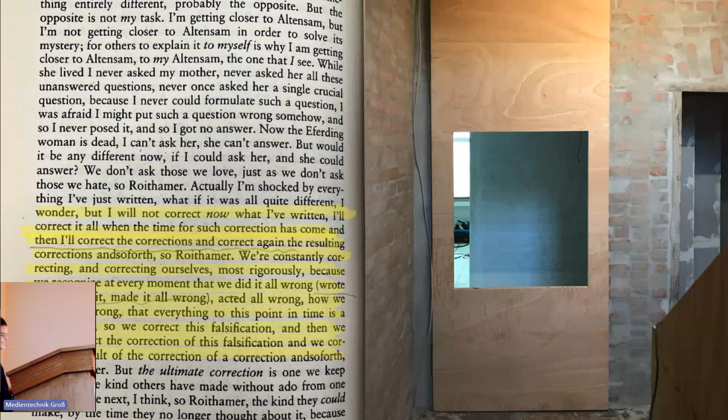I'm reading this long passage because he's very ambitious in this correction, maybe also the way that we work through this house. You can see, for example, the door, one of the first ones that we built, which was also good to use during summer without any glass or real climate use.

After a while, when it became cold, we had to fix it a little bit, and then, of course, put a glass in it and finish it so it could be used. These corrections can also be read as a correction of the house, which is a little bit small, almost downscaled. We made the door blade bigger than the opening because the house was not as magnificent as the other 19th century houses.

Building this one door blade also required some more adaptations, like the way it closes with a specifically made metal plate, and a lock that is built into the door itself. Then, for the next floor, we corrected our initial design.

We made a twin pair of doors, and you can see in the staircase, which had originally been stolen for firewood by the neighbors, that we have a temporary one. Two doors are already built, while the other story of the house, although we are living in it, is still empty.

Now, with temperatures declining, we also made another small correction and added this door closer. And here's another view into the staircase, where you can always read which parts of the building are inhabited and which are still bare.

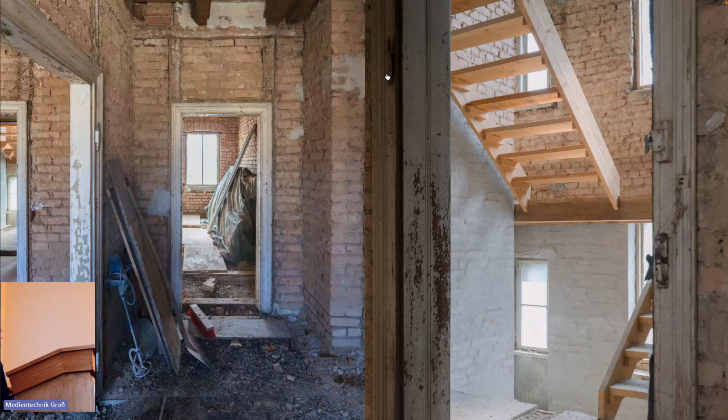In the beginning, this is an impression of some of the bare walls. It's nice to learn that these buildings are easy to demount, and you work with the material, very basic means. It was fully populated by pigeons, and unfortunately it took some years to clean it up.

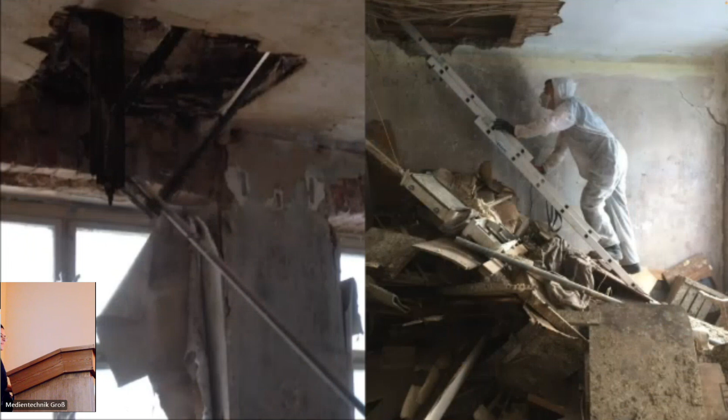We had the chance to correct a lot because there wasn't so much substance that you had to keep, or that was worth keeping. So we stripped everything to the blank bare walls. Another image of a destroyed room, almost, with ladders put through the building to find holes and climb up through them, since we didn't have a staircase anyway.

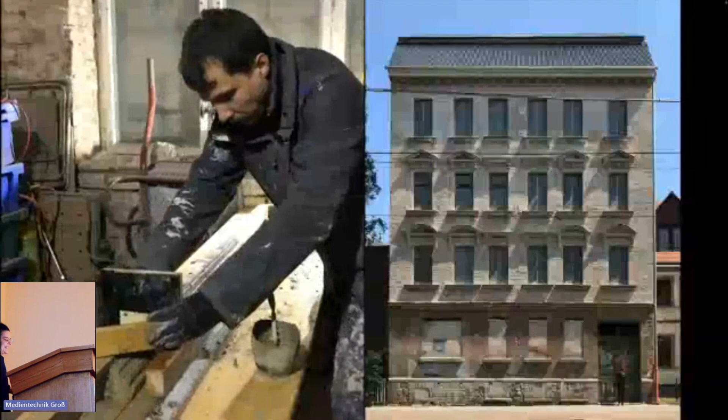And maybe moving to the outer side, you can see that it was covered with a net. We used a contractor's scaffolding in the beginning and didn't have to pay a lot for it, so we could attack all these ornaments on the facade ourselves, start correcting them, and learn which parts were made from plaster or concrete.

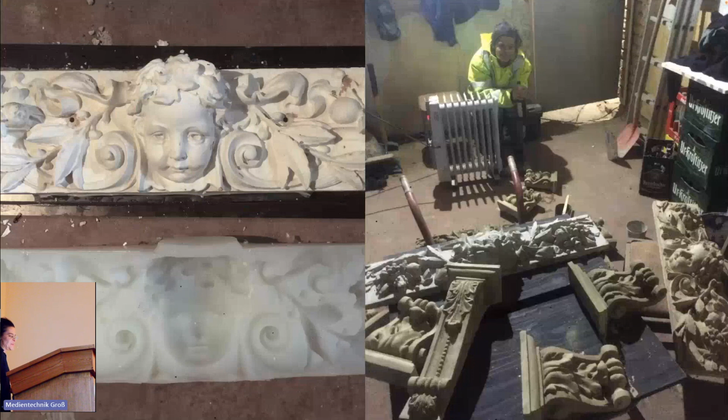We used two-component silicone to make molds of all the existing ornaments, and every week you could make a new one, since that's how long it takes to dry. When you have to make 52 of them, it takes a whole year, which we did while commuting between Zurich and Leipzig. Of course in winter it's difficult because the silicone doesn't react and stays liquid.

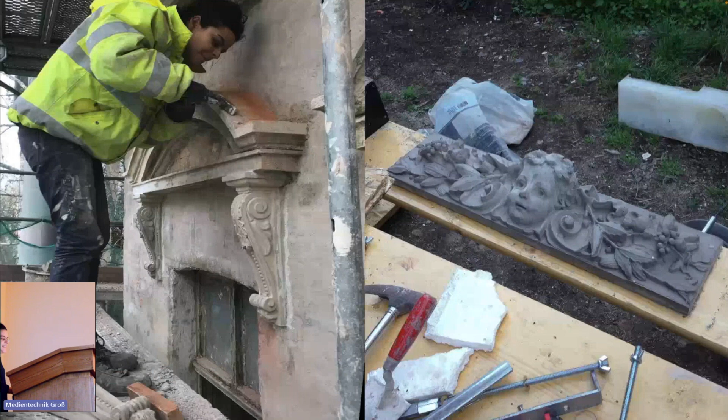We managed to mount these ornaments back with some glue and chemical anchors, while other parts made from sandstone you just repair on site. It's nice to learn which parts of the facade work in which way.

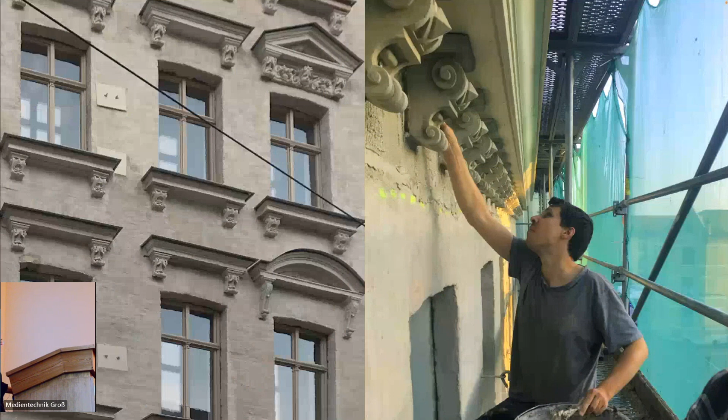In the end, the plastered walls just had a small, very thin layer, because we couldn't manage to bring all the plaster buckets up on the ladder. I think it's a phase that will remain like this for maybe two years, until, if we can afford it or if it's necessary, we rebuild the scaffolding and finish or even repair what we already did.

Another part of Thomas Bernhard's Correction is this perfect cone that he's so obsessed with, which he built for his sister. After his sister's death, and after his own death, the cone must be entirely abandoned to nature. There's no telling how far Roithamer's heirs will go along with that stipulation. Once she sees the cone, she's bound to be happy, underlined. A perfect construction is bound to make the person for whom it was constructed happy, must make her happy again. The idea was to make my sister perfectly happy by means of a construction perfectly adapted to her person. Well, in her case, the whole building was so perfect that in the end the idea basically failed.

So this is maybe not what we take as a reference, but the obsession, and maybe the positive way that working on your own and making corrections could have. Since our building is not perfect at all, we can afford to make all these corrections, because we think we invested little means, so it also doesn't hurt to rethink what you've done.

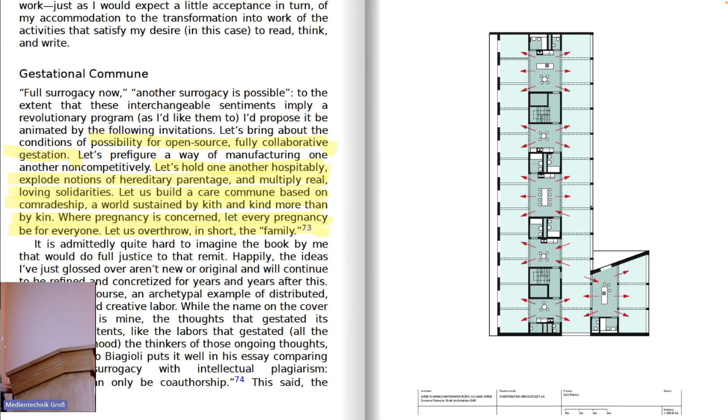When we set on this competition, we were working on a lot of different modes of flats. In the competition brief, we rather proposed to offer one structure where we hoped that all of these different flats and modes of living could take place, with no typical master bedroom, children bedroom structure to be found. So we combined all the services, staircases, bathrooms, kitchens in the middle, and thought that the facade rooms can stay flexible and neutral in use.

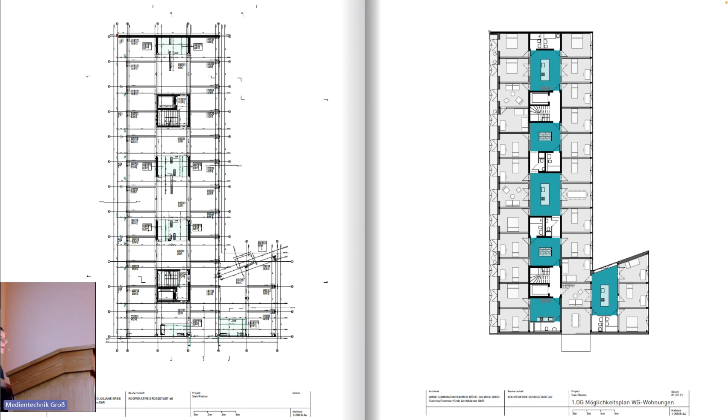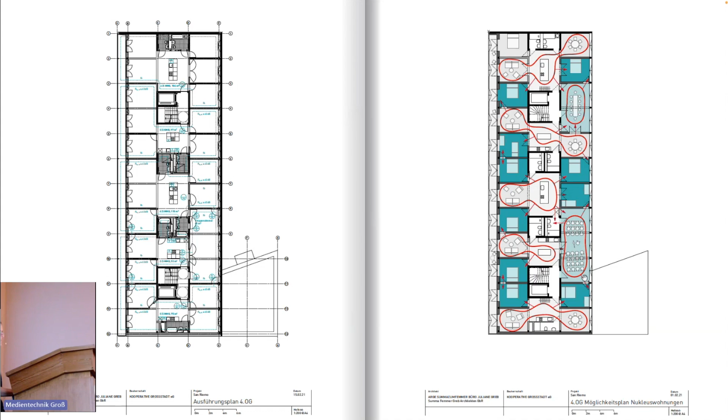Already in the competition, we drew these diagrammatic plans where neighboring living rooms can be shared, so flats work together. A floor plan can also be used for shared flats with a lot of bedrooms, and a floor, now on the 4th floor, where rooms have several doors and apartments are linked and connected through communal rooms shared between several other flats, like the light green one here.

This is another excerpt of Sophie Lewis' thinking: that children are not your own, but genetic heritage is just a reassembled genetic package. She is promoting full surrogacy, meaning to take care of everyone.

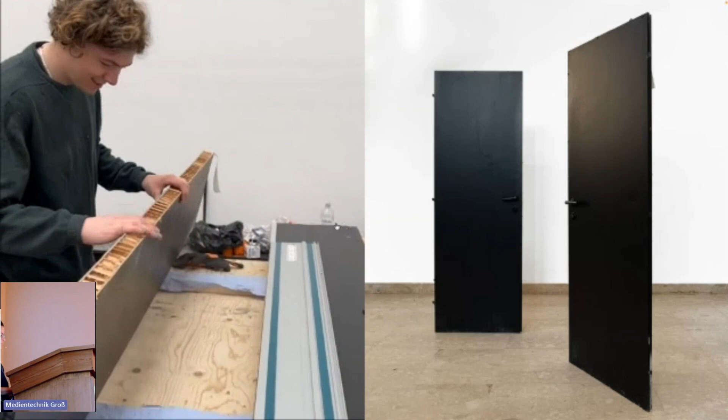Maybe another small excursion into how we built the bathroom. We collected a lot of material in the Biennale because the aim was to always work with what we found there, to not bring in any more material. It's part of our idea of being open for maintenance, where we also maintain our environment. We also found this material, these two Italian doors from the Italian pavilion, and made them wider and higher because this toilet had to be accessible. Accessibility is one of these topics that talking about toilets and taboos and inclusion also touches.

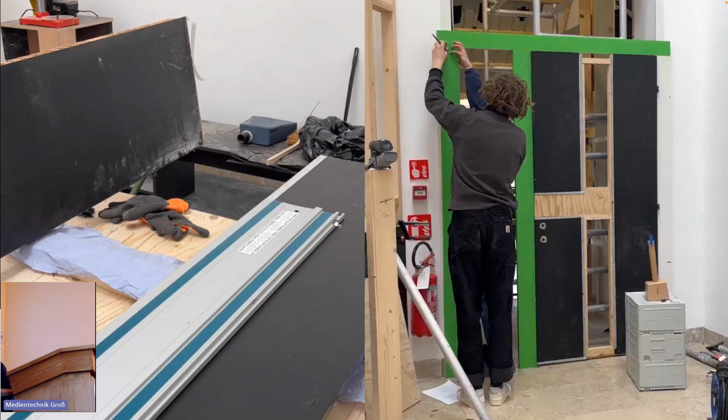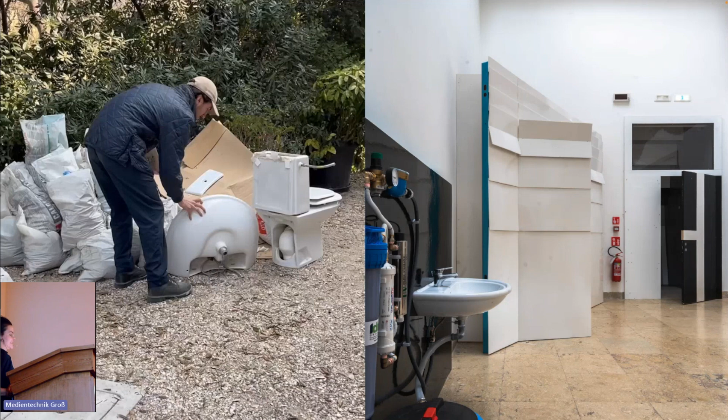So the idea was to make this enlargement of the two small doors visible. Here we mounted a side window to the former exit door of the German pavilion. We also found this sink from the British pavilion, who renovated their bathroom, so for us it was perfect for these six months. And we used this water recycling plant, because the pavilion doesn't have wastewater or water, which was the beginning for us to think about an alternative way to build a bathroom, which kind of started this whole process.

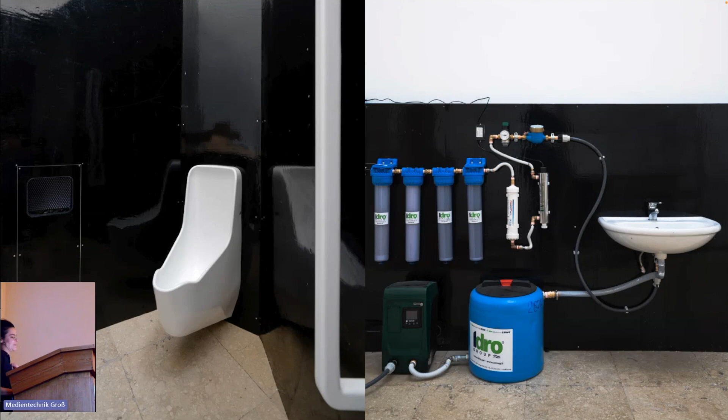Another feature was this gender-neutral urinal for men and women. You sit on it forward and backwards, and it was a bachelor project by two design students in Bern. It worked very well for all the visitors. It was maybe an obvious one. It worked without water, since everything here works without water. It was maybe a little bit easier than our toilet, which you still have to get accustomed to, talking about taboos.

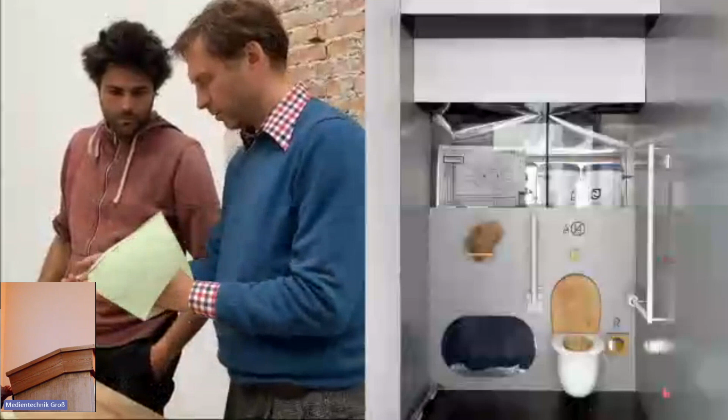And it's a design that is made as a dry toilet, also to be used in the cities. So the idea is that you have a chute. The inventors, Tom and Florian, took a lot of time to design this bag. They showed us how to cut it. We had to reproduce many bags also with the students.

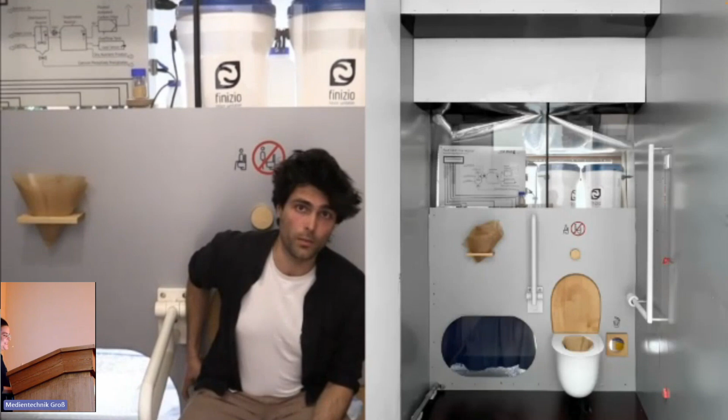When using it in the toilet, you have to put the feces in the bag and try to hit the urinal separately. Then, as he's pointing to, the bag slides through the toilet, and you could collect all the excrements basically in the basement of a building, of an apartment building. So this is the idea. They also have it patented. We tested it six months at the Biennale live, and we also really collected all the excrements.

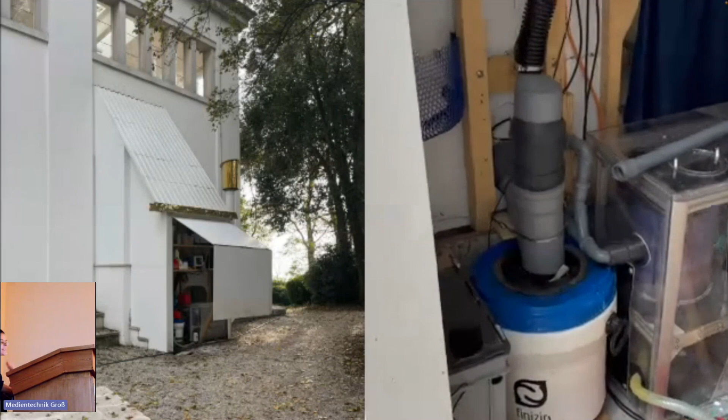And I mean, of course, it sounds maybe funny, but we are really fascinated by it, because the idea obviously is also to use the products in the end as fertilizers, and to try to create a circular treatment of it, and use it in the end also for excrements instead of flushing down everything and then using a lot of energy to clean our wastewater again.

We had to kind of hide it because it's not allowed to transport these substances on the vaporetto, so we covered it with an alternative sign, and then gave it to a farmer growing biological crops on the mainland.

So exemplary, we tried to show the whole process one time, how things could be done differently in the cities. And I would like to use the idea of purity and danger for another sub-project in this Biennale exhibition.

Mary Douglas writes: first, consider beliefs about persons in a marginal state. These are people who are somehow left out in the patterning of society, who are placeless. They may be doing nothing morally wrong, but their status is indefinable. So things that we don't know, or that are marginal and cannot be put into these categories, are special to us and maybe are not taken care of.

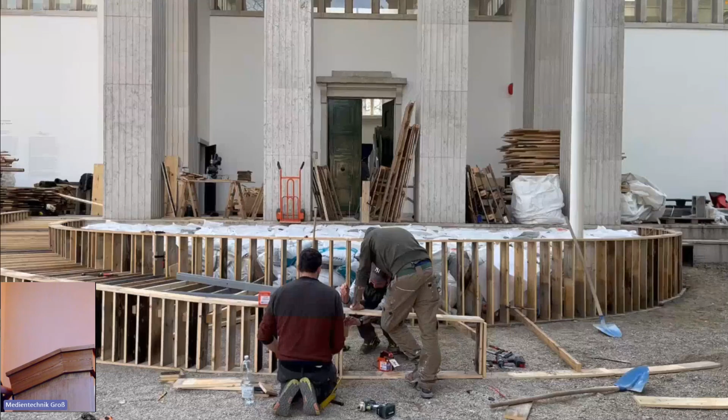Like these ramps everywhere in the pavilions. Since we wanted all of our installations to be useful and practical, and this ramp was broken anyway and taking you on detours to the back, we designed a new ramp out of existing material like the Ukrainian wood and sandbags, and built a more magnificent entrance gate covering the staircases of this Nazi building.

Which Ernst Haiger rebuilt in 1938, I think. For us, this is now a symbol for inclusion, but it also made sense while working because we could use it for our work and also for some heavy machinery.

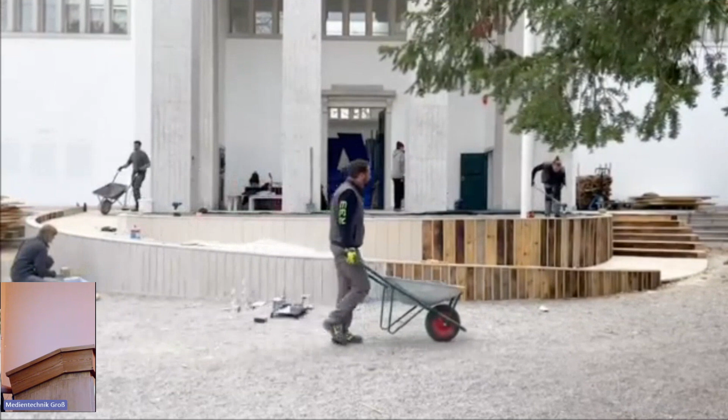We spent this time camouflaging the ramp to match the existing structure, because we also continue building with what there is, and in this way we reinterpret the whole building with its problematic history.

And of course, also as an architectural idea of how to work with reused material, we wanted to test some other strategies than only collaging, like we did when painting everything in the same kind of stone.

Also, during everyday life, seeing this infrastructure at work was nice. After we set up all the exhibition, we started a 6-month program where we invited apprentices and architecture students every week, and they also used this platform to work.

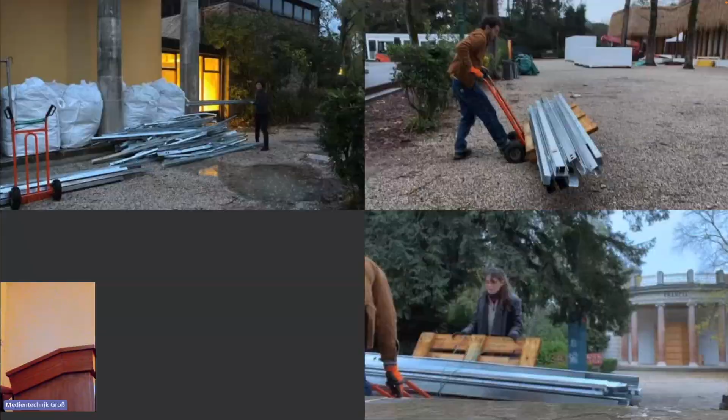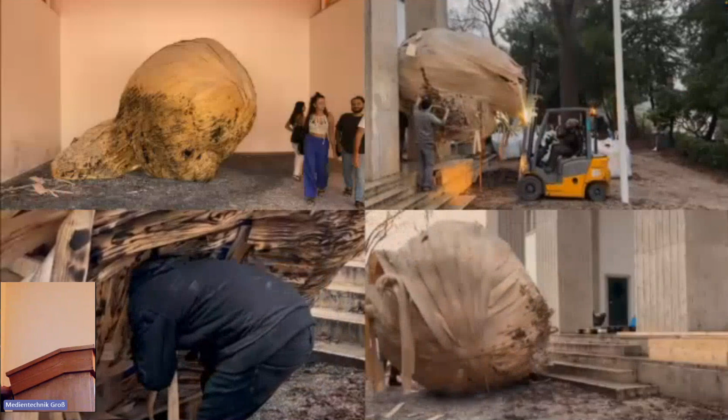The idea was that all the recycled material we collected in the main hall could be used for small interventions in the city. This is how we collected everything from the Biennale area, and also some bigger pieces of artwork which in the end didn't fit and had to be cut off.

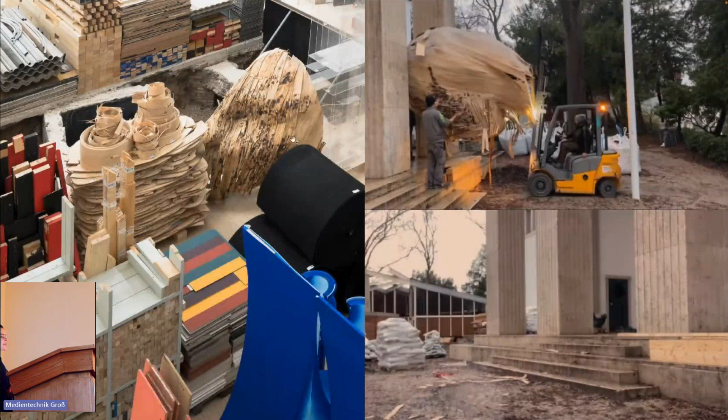Here you can see Latifa Echakhch's sculpture, but only maybe a quarter remaining in the main room, as all of the material was used up by these workshops in our installed workshop.

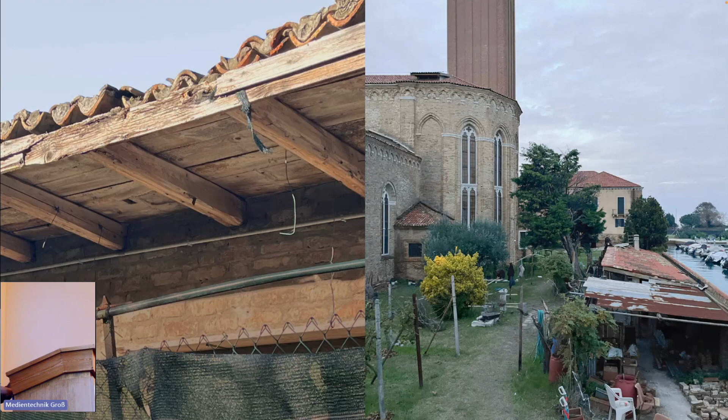Presenting all the working tools, one of these workshops, for example, involved repairing a small shed next to a very beautiful monastery right at the lagoon, with students fixing roofs using some of the wood from the pavilion, and also cutting or repairing another door.

Very carefully cleaning it, and while cutting the material in the workshop, it apparently smelled a little like frankincense. So they figured the wood was maybe already used in the monastery somewhere else, and had this smell—so it was maybe already 400 years old.

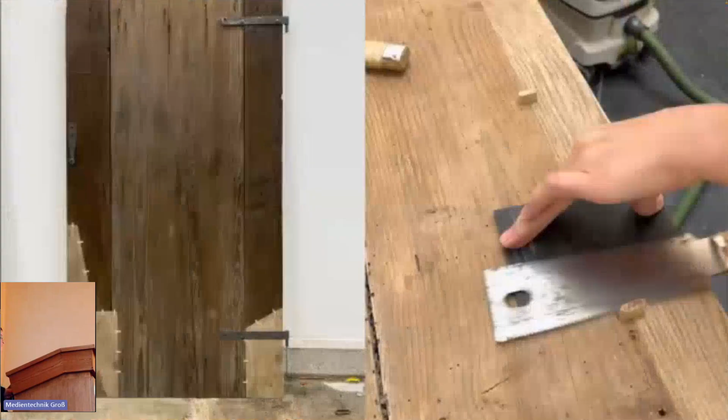So you start to treat it very carefully, only removing what is really bad, and taking the chance, although the work is very small, to still design carefully, like they did with these dowels and patches shown here.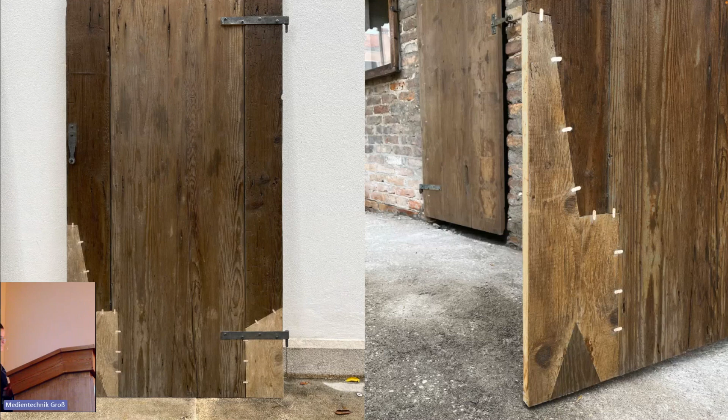I have a very short last door to show, from this student work. Anyway, we also built a lot of doors, because we are obsessed with details, where all of the problems come together in doors.

We did a whole semester with our students only working on doors, because you can exercise and practice a lot there. Although it's only small, it bears a lot of material for discussion.

In the end, for this semester I wanted to show the closing striking plate, which Lucius Burckhardt is maybe an inspiration for. It's maybe the minimal intervention, the English title of this book. This is a closing plate that was broken on top, where the door didn't close anymore because a part of the plate was missing. Although he's talking about urban planning and a much bigger scale like landscape design, we think it's suitable for these very small interventions too, because we are in control of ourselves.

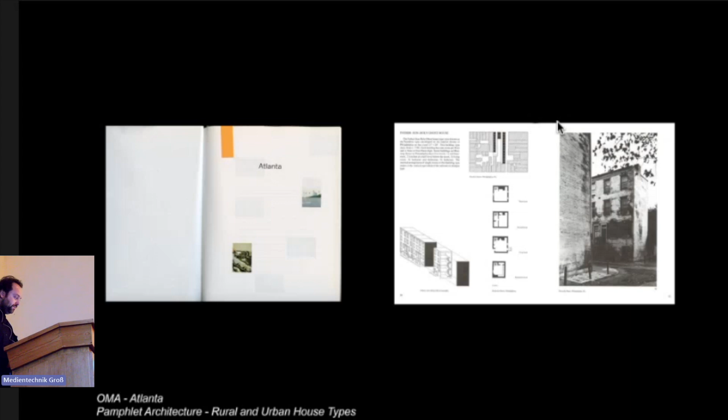So we were looking at other architects' works who were researching American architecture, but also in the realm of the arts and photography, and things between art and photography. But also documentaries, movies, video art projects, but also subcultural zines and magazines. And the idea of archiving became very important for us.

So we always call these trips unscripted investigations, because we do prepare them quite thoroughly. We do this very intense mapping where we try to put everything into maps that might be interesting for us to visit, and then we mostly book a first hotel and see where the journey is driving us. This led to a number of very curious visits, visiting places and meeting people.

So we document important and not so important buildings, street scenes, but also encounter various people along the way, and try to channel these into different formats, like publications—this last one, Cite, which is a Houston-based magazine—but also exhibitions where we try to channel the videos, the scraps, the conversations, the audio files, everything into pieces.

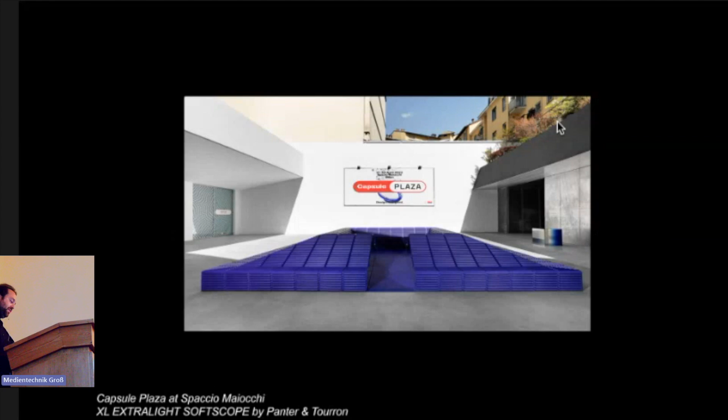The specials, on the other side, are longer stories where there's often a collaboration between an office, but also a company or brand. Last year, for the first time, the team around Capsule also introduced Capsule Plaza, an ongoing idea of bringing this print medium into realization, working with younger and established practices to create an environment of exchange, exhibition, listening rooms, and discourse.

It relies on the idea of - this is where it's located, in this 1980s industrial block, where the rents are cheap in Zurich, or cheaper. And it relies on this idea of associations, Vereine. In Switzerland, the easiest way to be a legal entity is to found a Verein, an association.

So in order to rent this space, we founded this association and got together with a number of people. By this we also created this table of Statuten, very short, because usually you have all these rules and layers, but we wanted to keep it simple and develop these Vereinsstatuten along the way. Soon we will have a revision, adding some new ones and taking out some old ones - this is a process of founding this association that is still ongoing.

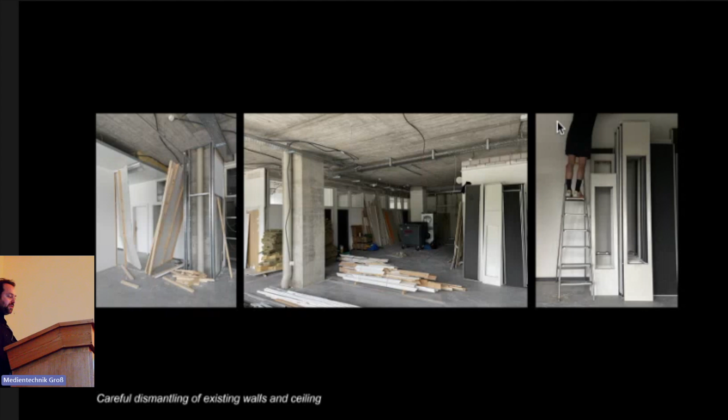Because the space didn't really meet the needs of all its members, but we also didn't have any budget, everything that we did in the space was done by the group - a good idea, but not so easy to coordinate with 21 individuals, most of whom have full-time jobs, being self-employed. But time has been used as a resource, as well as the resources that we found there.

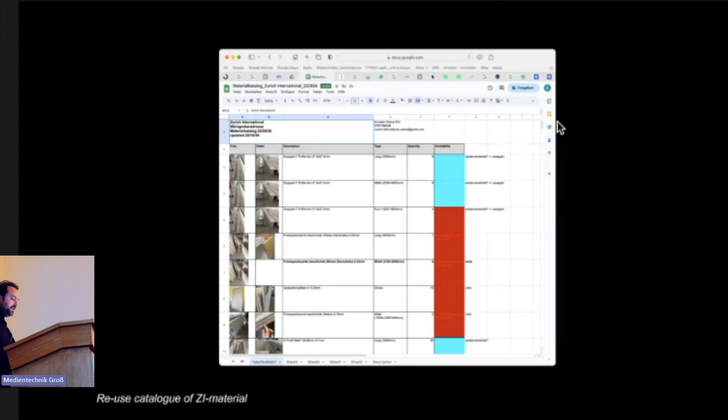So what we did was create this inventory list of elements that we disassembled - a careful dismantling of elements that we didn't use, like ceiling panels, drywalls, doors, and other things. The idea was that the contract gave us this space 3 months rent free, but we had to take care of what's inside. So we took in this deal.

We did a documentation of the existing space, but also then built these flexible infrastructures, what we call plug and play, where we have everything mounted to the ceiling.

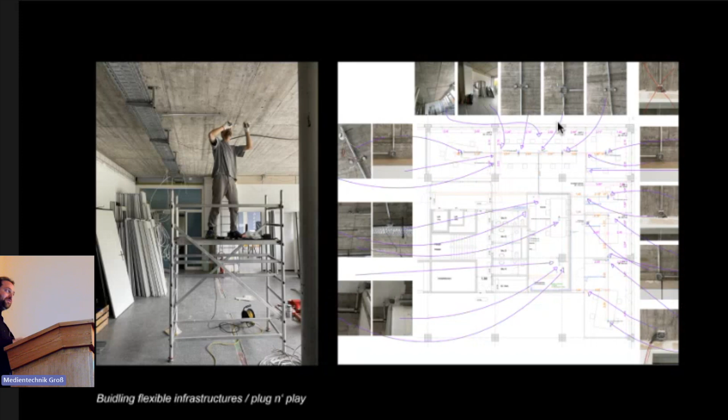So we took everything that was existing there away and created our new system ourselves. You could do everything yourself except connecting the last bit of electronics to the plug, for example. We did everything ourselves up to that point to keep everything safe and economic. At the same time, we also asked companies to send in their youngest apprentice to do the job, because that would ensure it's cheap.

We also work in collective design workshops where clusters of people work together to tackle new design tasks that come up in the space. We're nearly done, but it's still a work in progress. Just for scale, it's a 270 square meter office space.

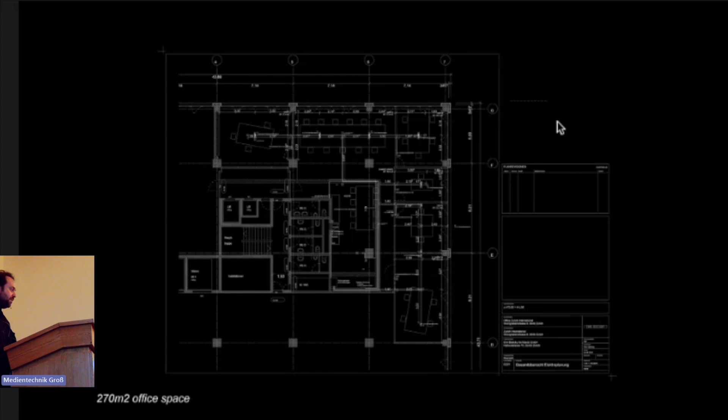But this big space also enables us to create events and use it according to whatever comes to mind. So we had visitors from TU Munich doing a trip to Zurich and doing their apéro at our space, but also private exhibitions, feasts, and other things.

As said, most of the projects we're working on are done collaboratively. This is a competition we did together with Amateur Global from Milan, friends and colleagues we met through Superposition. This competition was based in Basel, more or less in the heart.

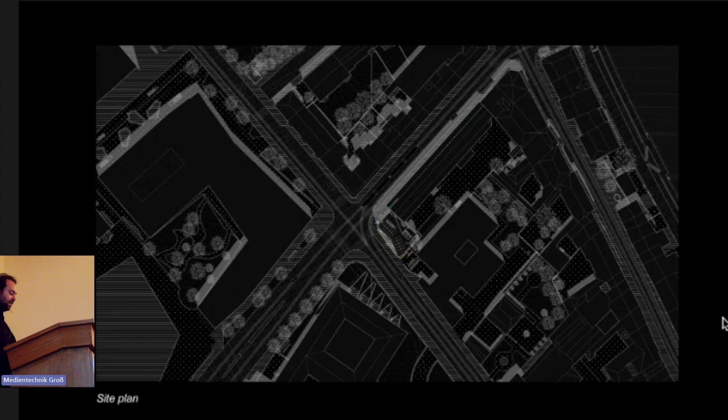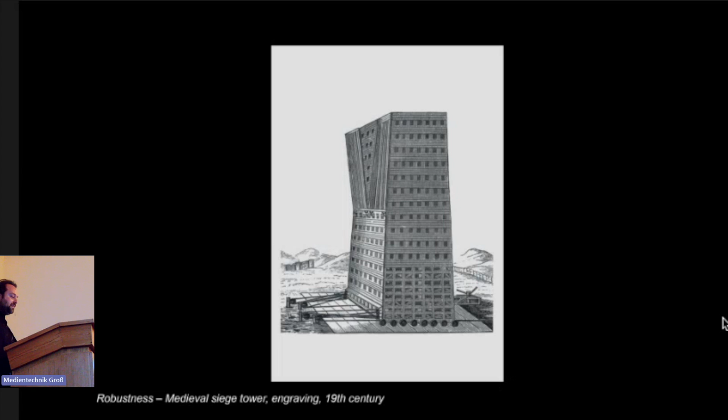It was connected to a new tram pass that would be installed. What we were interested in was finding a solution to make a connection between these two typologies — the big institutional projects and buildings, and also the smaller housing projects. So we tried to create a volume that is at the same time quite robust, but elaborate. We wanted it to be a timber construction, so we were searching for robust structures in timber that could sustain this idea of fighting against other buildings in their surroundings.

At the same time, we were interested in this idea of high and low tech, and how these elements can be transformed from one generation to the other. In this area of Basel in particular, you have a tradition of timber construction, so that was also a reason why we wanted that.

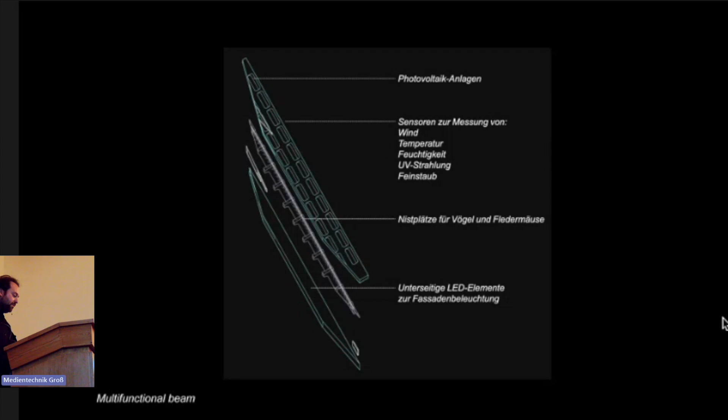At the same time, this high-tech element is something that came into place. You'll see in the images later where we involved a multifunction beam, which has all sorts of sensors for the building, and PV, but at the same time has nesting places for birds. So it's a timber construction with a timber facade that has these slits you'll also see in the reference — it's an office building for research, for the Bodmer Research Foundation.

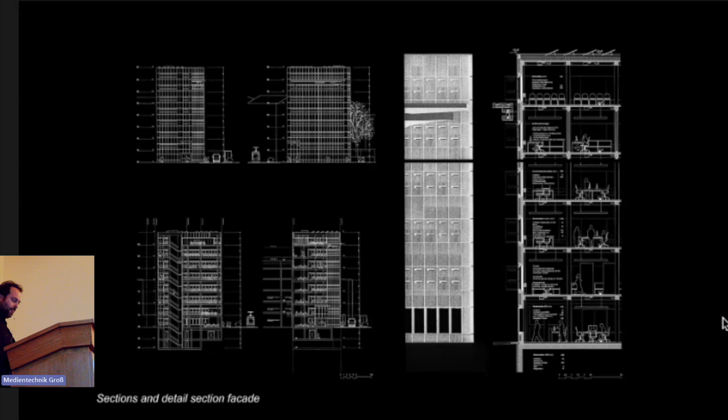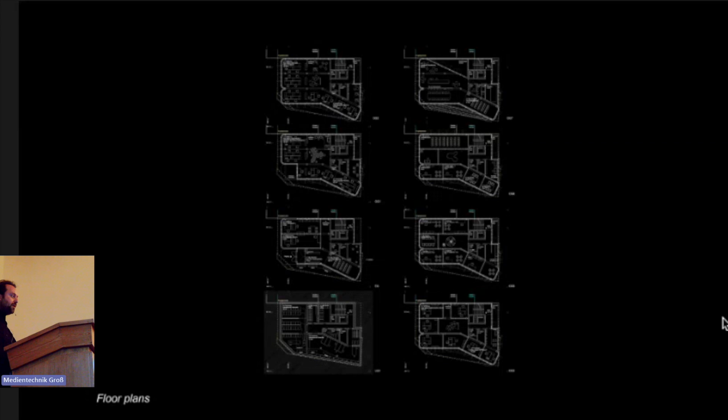And I'll just go quickly through these plans. What interested us in the end was also the economic factor of doing a competition. So what we tried to do with renderings, for example, was not render the entire image but only do half of it, to save time and money. But also use old renders and collage over them. This practice of not finishing an image was something we kind of fell in love with.

And in the next project, the reuse of images is a big topic. We always have a tendency to be quite late with the images in our projects, so each project has its own way of dealing with that.

The second competition we did with Amateur Global was Davoser Pflug, a master plan and urban scheme project, but at the same time creating a new train station for Davos Dorf. Most of you probably know Davos from the World Economic Forum or ski trips.

But Davos is a city divided into two parts — Davos Platz and Davos Dorf, with two train stations. It's a Streusiedlung, which is a typical settlement you would find in Switzerland.

The proposal was to move the existing train station 200 meters to the new city center square, and to create housing and hotel projects along the way. This is the context that you would work on.

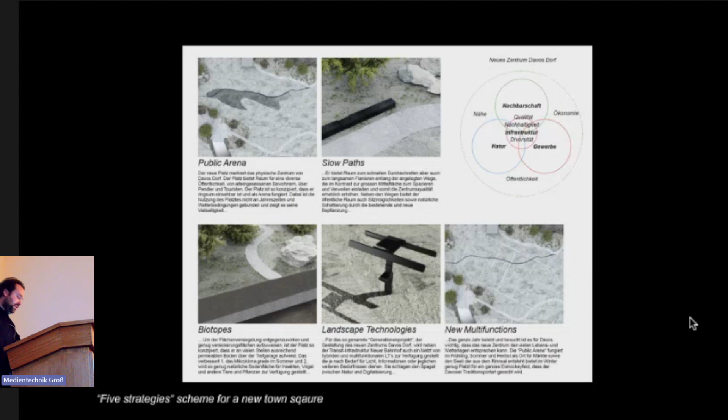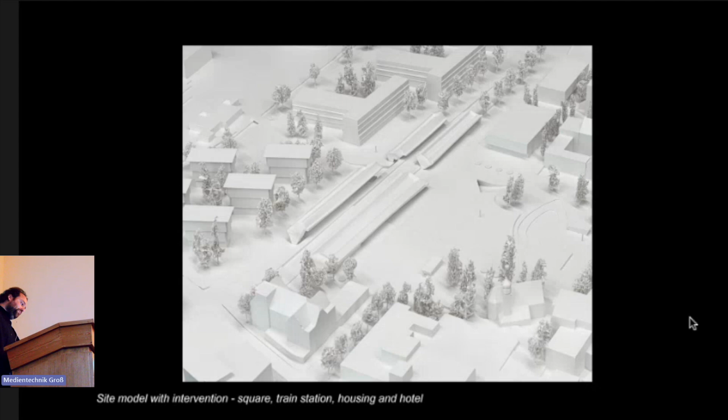Quickly go through that. With this Davoser Dach, we were thinking about a new idea of having a roof. We tried to find a new solution for the Davoser Dach, which is this elongated structure along the train tracks, where we would use also the structure as a biotope. I will come to that later.

For the housing project, but also the hotel, we were looking at traditional housing projects in Davos and trying to apply that to the new structure. This is the master plan.

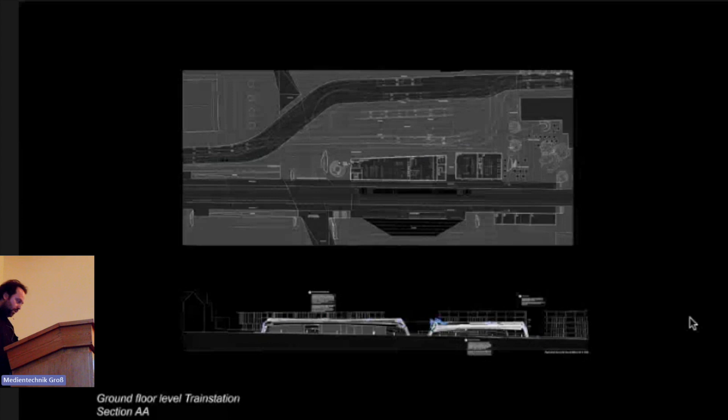With this big square, I will quickly skip that. Yeah, it's a typical infrastructure urban project with a huge parking lot.

But this brutality of the train piercing, for example, through the snow, is something that interested us, having a structure that can deal with these harsh environmental conditions of Davos. Something you should realize is that in Davos in winter you have these strong snow conditions. Even with climate change and warmer winters, you still have a lot of snow, and that's why we tried to find reference in these snow pierces.

We worked together with another office from Milan, but also with friends of theirs who were developing a new kind of aggregate concrete that would be porous, so that vegetation could take over the building over time. So in the beginning the building will be quite harsh, but then over time it will be overgrown.

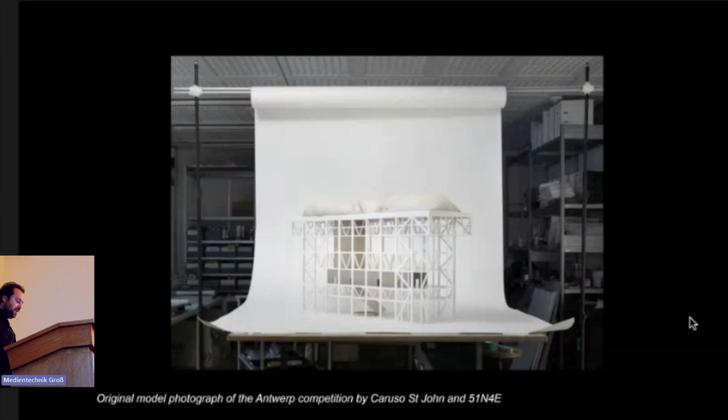This image is a reused image that we stole, so to say. We asked for permission from a competition that 51N4E and Caruso St John did. So this was again a way for us to produce images where we would put our mock-up into this office environment that we took from 51. It's for us a way of reusing images, so again we have this problematic with image use where we would recycle images.

I'll quickly skip that. So the last project I'm showing is the latest competition that we did. We didn't do a competition in one year now because we were concerned with other projects that consumed most of our time, because we're still the two of us working.

This is a competition that we did together with Schneider-Türcher, friends and colleagues from Zurich. Claudio is a colleague of mine at the chair of Adam Caruso. It also brings up the question of collaboration again, which always brings new complexities to the planning process. But with them, it was more than a delight to work, and also very fruitful for the result.

The competition site is located next to Rosengartenstraße, which is one of the busiest streets in Zurich, very loud. It's a reuse project for a church. In Zurich you have over 50 empty churches, mostly Protestant churches, and the city of Zurich wanted, with this competition, to find solutions for what to do with these empty buildings.

So the new program for the church would be to introduce an educational purpose: a library, a multifunction hall, an eating place, and secondary storage rooms.

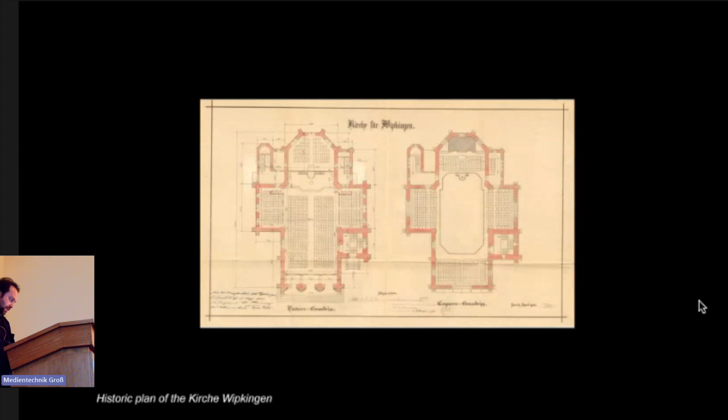The church is neoclassical but uses Gothic elements, typical for Zurich in the late 19th and early 20th century to have these historicist churches. It was used in the last two years of being empty by the Klimajugend, a climate youth organization that organizes rallies and also productive strategies to fight climate change. They're all students, so the church provided them with space in their building.

This was important for us at a later stage. There had already been a usage in this church that was a little bit ignored by the program, but not by us.

This is the former main entrance that is now barricaded. For us, it was important to ask how to transform this spiritually charged space and reopen the building to the public.

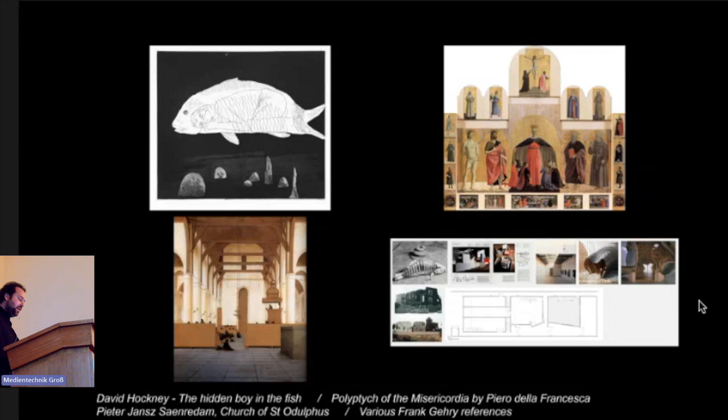We looked at different strategies of how to work with a body and encapsulate a body within a body, and found this very beautiful hotel that was built but then burnt down a couple of years later. For us, it was like the belly of an elephant, resembling the belly of the church.

The structure that was built inside is something we found quite interesting, especially the friction between the existing structure and the new structure.

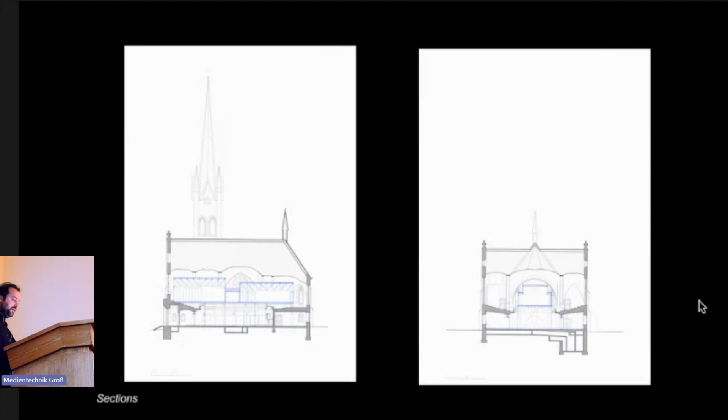So we built our own elephant belly, with a quite rigorous system of inserting functions, giving each function its own space, but also reacting to the changes in the geometry inside.

As said before, acoustics was a huge problem, so we wanted to seal the structure inside off. At the same time, temperatures in this church in winter are very low, so we needed to find a solution for that too, while also wanting to make use of the heat that this core creates to make the surrounding spaces usable.

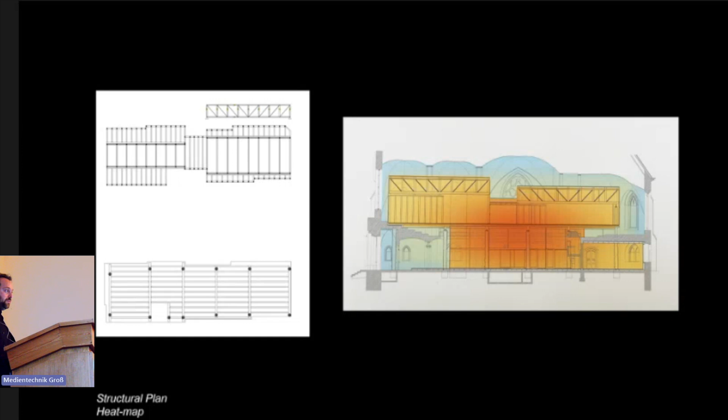For a school in Zurich, there's a specific mandatory temperature you have to stick to, but when you have a body that warm creating heat to the outside, you create secondary spaces—we wanted to provide these for the Klimajugend, for example, or other groups that could use the former stages.

So we have a timber construction on tree trunks. The tree trunks are the same diameter and could even be taken from the surrounding landscape around the church.

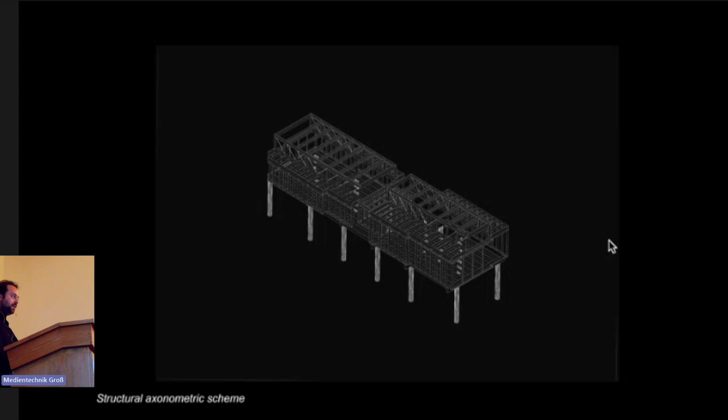This is the body in the church. So you have the ground floor with the existing building, you have the food hall on the ground floor, and on the upper floor, which is a little bit higher, you have the library and the event hall.

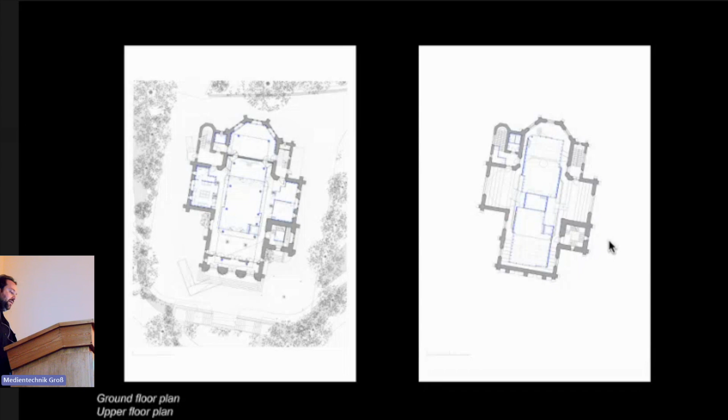With the stages on the side being free, you create space for informal interventions—playful spaces for children to explore. The goal was to touch no walls, but at the same time create new points of interest, so to say.

What it ended up being is also a fragmentation of the church space. This was important for us, to take away a little bit of the spirituality of the space, while not ignoring the existing building, creating relationships between the new structure and the old one.